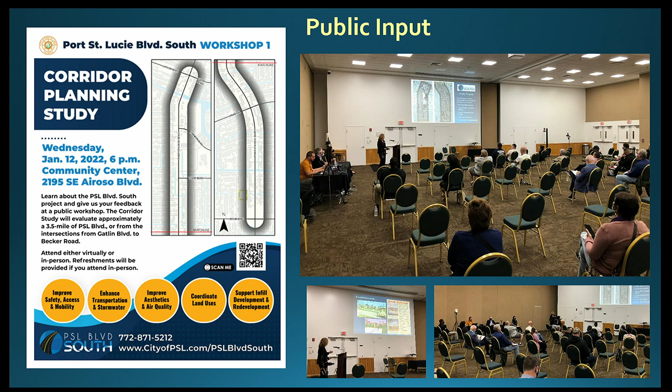In this venture, the city reached out to us to assist the city staff and the public in having a conversation about Port St. Lucie Boulevard. With respect to public input, this workshop is the second one. The first one turned out about 40 people in the room and about 40 people online. So we had a pretty good participation back in our kickoff workshop to get ideas about what kinds of questions we should be exploring as we think about how the corridor performs.

And we heard a whole lot from the public. What we heard was, it's the PSL Speedway. So there's a lot more speeding than could be safe for folks to walk or bike or even drive on the corridor.

We need transit on the corridor. We need wider sidewalks and street trees. It's too crowded. There are too many new single-family homes being constructed, even though that is the default condition, right? We have platted lots of record in the city, so any single-family lot that exists can be built as a single-family lot. Nothing would ever suggest those rights would be taken away. However, that means a lot of driveways intersecting the roadway, and that creates different problems when it comes to traffic circulation and access and mobility as well.

And so if not single-family homes, the public said, can you think about other things that might be appropriate otherwise? The city's already taken some steps to try to allow different types of development, and we have some illustrations for you to think about this evening.

The widening of the road is overdue. The city needs more playgrounds and active space and tree canopy and fitness trails and things to do and places to go, because the city is long on population but short on those kinds of destinations.

Intersections are becoming more challenging. We need to be concerned and mindful about paying for improvements if we identify them, and so the improvements that we've identified, we can have that conversation as well.

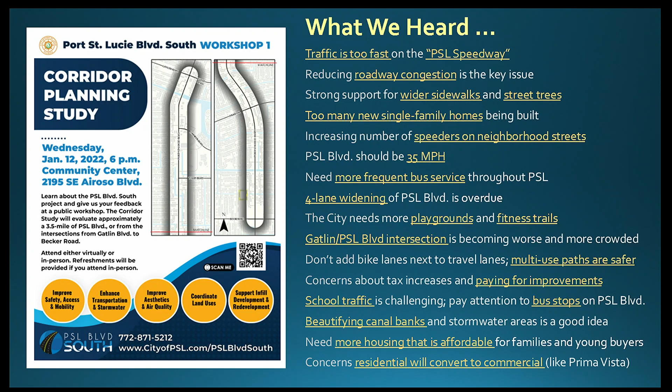And then finally, of course, we know that residential has tended to convert to commercial over time, and that's something we should be mindful of on the corridor, because that creates different conditions when single-family homes now then become operating as small businesses. So that said, just a little background, if you will.

The city of Port St. Lucie is one of the fastest growing cities, not just in the state of Florida, in the United States. It's now the 7th largest city in the state, and the largest city in the Treasure Coast region. The city's done a really excellent job of documenting how quickly it's growing. But just by way of illustration, looking at our population, we're already at 214,000 people and projected to surpass 300,000 in the next few years.

With rapid population growth comes an impact on services and facilities and infrastructure that creates the need to have conversations like this one: take a pause for a moment and reconsider land use patterns before that next wave of investment and residents land on the ground.

The kinds of trends that we talked about in our last workshop, and the kinds of trends that we ask communities to consider as we think about planning, are summarized on this next few slides.

One of those trends is our population demographic is changing in Florida. It's changing across the globe and across the country, and in Florida as well. We're getting older and younger at the same time. The baby boomer population is actually going to be the smaller segment of the population. What's growing are the millennials and Zoomers, the next generation down. Millennials will be 50% of the workforce in the next 10 years. And Florida is getting older as a community at the same time.

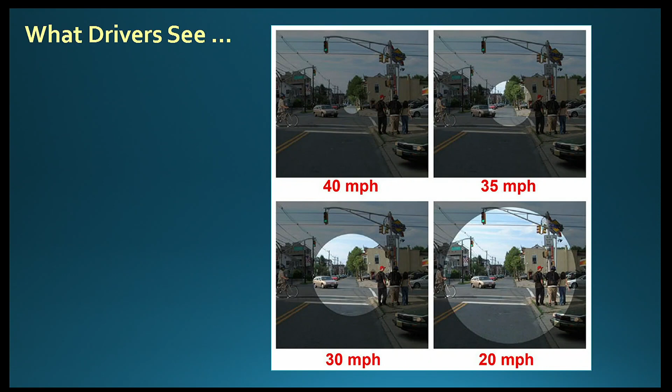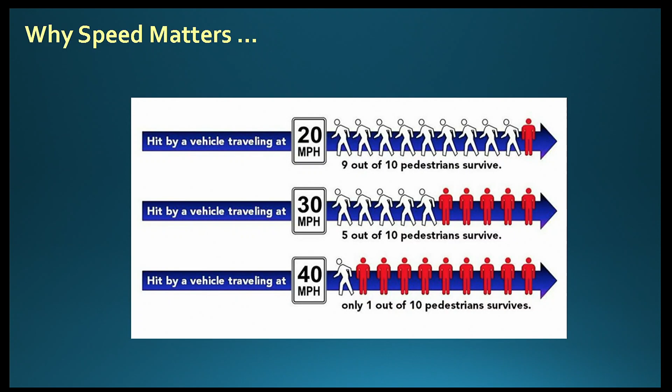The other reason speed matters is that the faster drivers are moving, the less likely you are to survive an accident. At 20 miles an hour, 10% of accidents tend to be fatal, but at 40 miles an hour, 90% of accidents are fatal. So again, speed and the comfort with which drivers can move quickly or appropriately for the corridor has a direct relationship to the safety of our community and the quality of life we get from our transportation network.

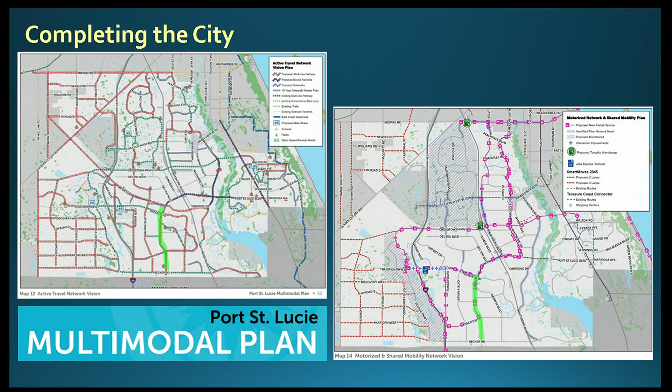The city's multimodal plan identifies improvements for Port St. Lucie Boulevard, which is highlighted in green—our segment is highlighted on the screen. As many of you know, and we discussed before the workshop, the roadway is going to be widened. In fact, widening is underway now. I'll jump forward to that in just a moment.

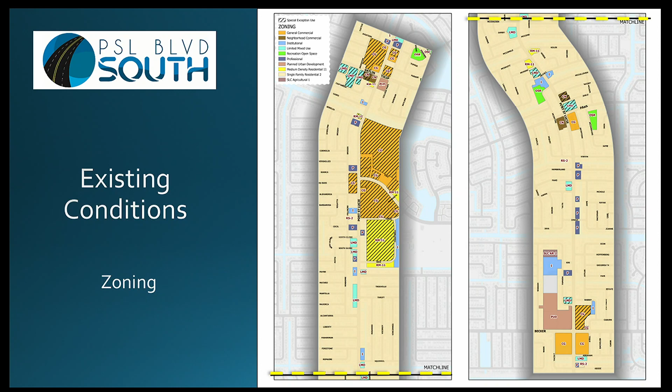With respect to zoning, though, we know that most of the properties have a residential land use designation, so there's an extra consideration necessary for them to go through that overlay process and become something other than single-family residential. We don't have a lot of vacant land left on the corridor, and that's a challenge for communities—not exclusive or unique to Port St. Lucie. It's a challenge most of Florida's communities are dealing with, at least in the Treasure Coast region, where we really are out of land in the core part of our cities, so redevelopment and infill development is much more difficult. It's a lot easier to build the perfect land use pattern when you have an open field; it's much more difficult to retrofit that pattern and find opportunities to make improvements.

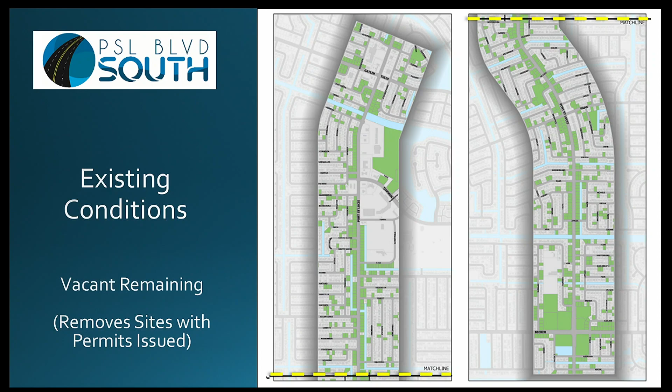This slide illustrates the vacant parcels that are left on the corridor. I have a series of maps that details those as well, but we acknowledge in the planning study that we have to be very strategic in finding those sites that can be improved in a different way.

Again, with respect to the roadway, everyone can breathe a sigh of relief—the roadway is under construction, being expanded from 2 to 4 lanes. As we heard in the workshop, there's a strong need for us to have more roadway capacity. As the road is designed today, this series of slides illustrates the landscaping opportunities that exist along with the road. As you can see, the city's already planning to have 2 11-foot travel lanes.

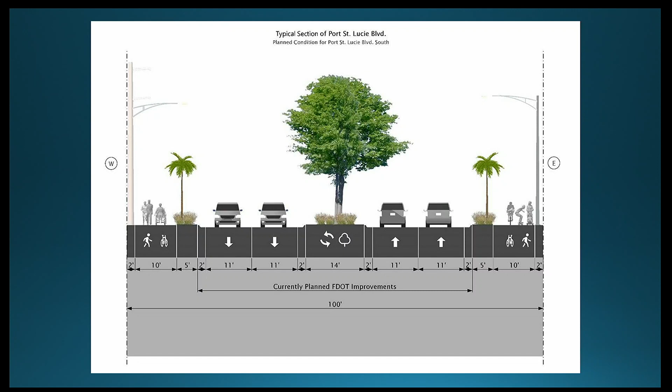As you can see, a fairly large median in the center—that median's about 14 feet. But then a fairly narrow landscape strip on either side, a 5-foot landscape strip with a fairly wide multi-use path. We generated some designs so we could get an idea of how that pieces together. In the landscape median in the center, it's wide enough to accommodate shade trees, which is great. The landscape strips on the side, though, are a little bit narrow, so in a 5-foot dimension you can accommodate a palm tree or maybe a crepe myrtle.

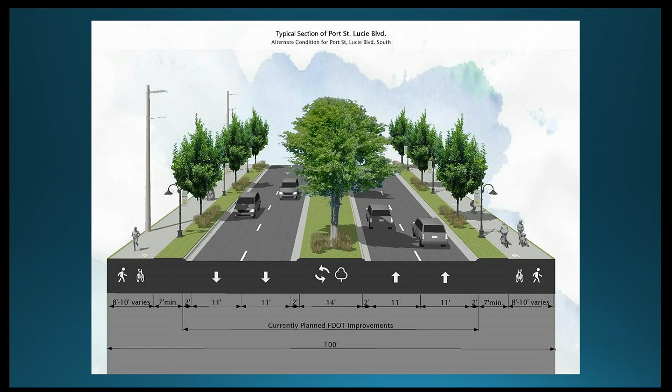One of the considerations we've suggested to the city is if we can, in some locations, widen that landscape strip just a little bit, we can accommodate larger shade trees. Those larger shade trees would help improve the appearance of the corridor and also provide more protection to the sidewalk, the multi-use path that exists on the side. Here's an example of how that exists in plan—existing condition, either palms or crepe myrtles—but again, that larger shade tree opportunity comes with a slightly wider landscape strip.

You can really get a better feel for how that looks at the ground level. There's the kid riding his skateboard who was riding it before the sidewalk was improved—now he's on a multi-use path. With either palm trees or crepe myrtles, there's some separation for that user on the sidewalk, but with a larger tree species, it's really game-changing. It's a small strategic intervention that creates a very different outcome for the user's experience.

The road can still travel just as fast, but a 10-foot multi-use path with limited landscaping isn't always as effective and desirable as maybe a slightly narrower path that's really well shaded. So this is a suggestion to offer to you as a community, to get feedback about whether or not you think that's something the city should explore.

I'll take a moment of pause and have a drink, because I want to be sure we have a chance to answer questions from you guys, and also just ask Lauren to see if there are any questions on Zoom. Keep going? Okay, I'll keep going. Yes, ma'am.

I think that's a great idea. I love it. I just have a quick question. So for the group who couldn't hear the comment, Millie thinks larger shade trees are a great idea, so worth exploring, okay? I see Jeannie's giving a thumbs up also, so, okay.

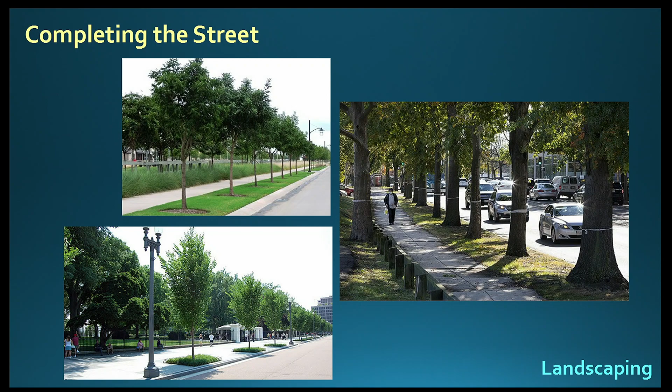All right, keep rolling. So when we think about completing the street, what are the tools in the toolbox that we have? The tools are things like bulb outs and curb extensions to slow traffic as it enters neighborhoods. We have an opportunity to light crosswalks, raise or light them so folks are more visible at night. We can add landscaping, and the type and quantity of landscaping has a material effect on how comfortable it feels to drive quickly. That's a strong consideration for the city with respect to how that corridor is built out over time.

Street lighting adds an amenity to the corridor because it doesn't just light the corridor, it creates a branding opportunity and a sense of place. Transit shelters are on the horizon — the city's done a tremendous job identifying an artistic transit shelter theme that will be implemented through the city. This corridor is on the long-term plans for transit service, so ultimately you'll see transit shelters like this one being installed.

A specific recommendation that came out of the process is the idea of having pedestrian refuges. One thing we know is that we have a pretty good distance between lighted intersections along the corridor, and pedestrians are usually comfortable walking a quarter to a half a mile. After that, people don't like to make that trip as often, and they tend to take shortcuts if there isn't an accommodation to allow them to make a safe crossing.

On our corridor, we have 1.25 mile spacing between lighted intersections at the southern end. So a way to accommodate pedestrian crossing along a corridor that's going to be a four-lane corridor is to use a pedestrian refuge, or what's called a HAWK signal, which is a high-intensity activated crosswalk.

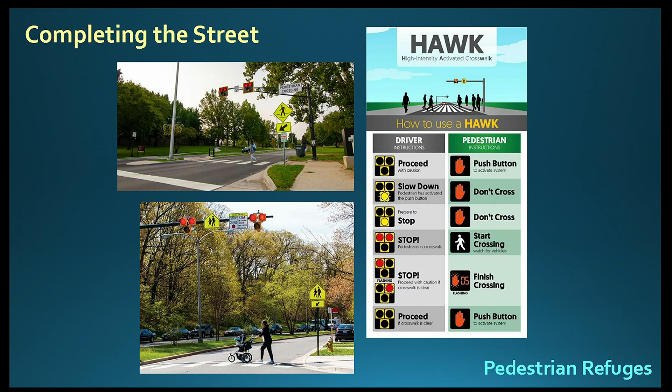It acts like a lighted intersection, but it's just stopping the cars to allow the pedestrian to cross, and then the light turns green again, and the pedestrian can be accommodated in the median.

There are two locations that we've identified for pedestrian refuge, and those are down at Gig and Macomb. Those locations break the distance down into thirds, so you'd have no more than a third of a mile between lighted crosswalk and pedestrian crosswalk.

So this is a suggestion to the city to consider. FDOT, the Department of Transportation, is amenable to that, and the city is exploring the permitting that would be necessary to install those, if that's an idea that the public thinks is a good one to explore. I see some nodding heads, so okay.

Moving on, yes Lauren? We do have a question online from Cheryl. She was, I'm assuming, talking about the street sections earlier. She says it doesn't look safe for cyclists to ride on the path with no bike lane.

The city's design does not include bike lanes on the corridor. Instead, bicyclists and pedestrians would both be accommodated in a multi-use path. There's a trade-off in the width of the multi-use path and the width of the landscaping strip, and that needs a lot of exploration. Fast-moving cyclists want either on-street bike lanes or wide multi-use paths, but they don't tend to represent the bulk of riders who are out there.

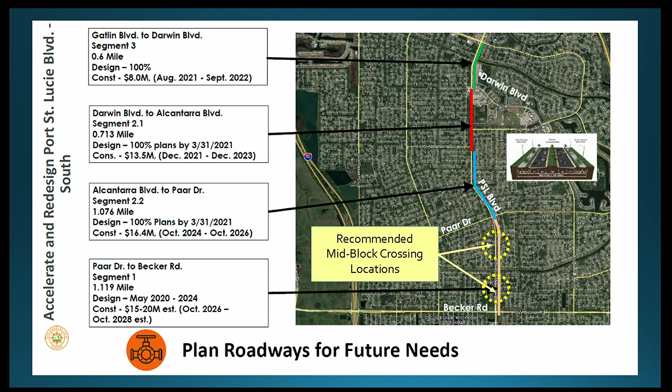Jumping down, the tour of the corridor. Through the design process, we mapped out the corridor, all of the ownership, and all of the existing buildings on the corridor today. These maps illustrate a figure ground that takes us from Gatlin Boulevard all the way down to Becker Road.

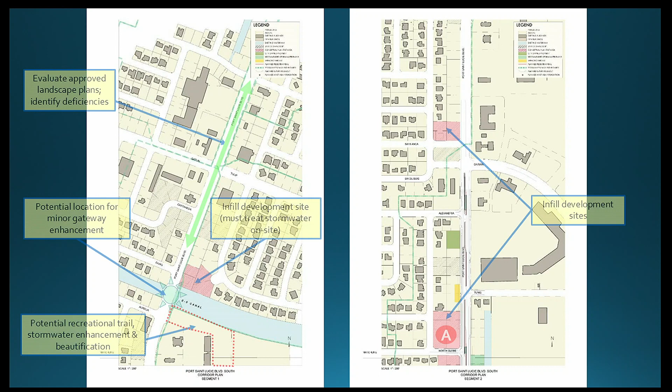As part of that process, we identified all of the opportunities that were reasonable to consider for some type of improvement. From Gatlin to the E-8 canal, we don't really have a lot of vacant land to work with, so identifying properties with landscape deficiency is the best way to improve that corridor. If a property's landscaping is deficient, the city has the ability to work with that owner. Keep Port St. Lucie Beautiful is a great partner to help private commercial property owners bring their projects back up to code. That's really the extent of the likely improvement in that section.

But as you get south on the corridor, there are lots of opportunities identified through the process for different types of aesthetic enhancement and beautification. For example, the E-8 canal—I'll go into detail about these, but I wanted to give you the overview as we start to tour the plan.

Those parcels in pink are the parcels that have common ownership of more than half an acre. Those are the infill development opportunities. We tested a development scenario using parcel A down at the bottom of the slide, and then parcels B and C across the street.

Those are up near Darwin Boulevard, just north of Darwin Boulevard, pardon me, where we have opportunities to expand stormwater through the city's acquisition, identified in green. There are methods the city can use to acquire property and improve it for stormwater and passive park use at the same time.

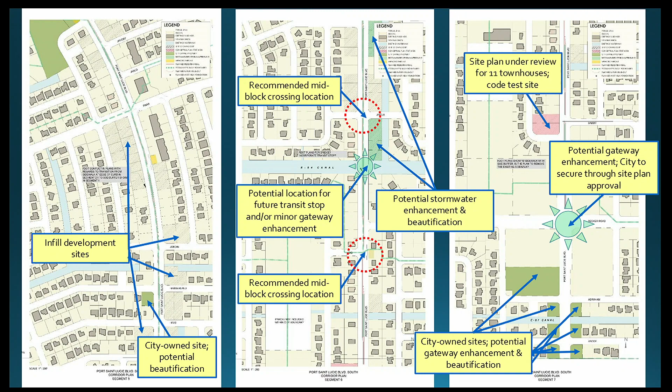As we get further south down the corridor, there are a series of modest infill development sites, 2 acres and smaller. The mid-block crossing locations are identified in those red circles down near Macomb and Jingle near the school, and there's an opportunity for a significant improvement at the intersection with Becker Road. I'll go into the details of those, but we do have a broad view perspective as well.

So the first category is ways to get more out of stormwater properties. As we tour the corridor, the canal banks and the banks for stormwater conveyance, ditches and canals, are city-owned parcels that serve a very important function in the city. We don't want to suggest anything that would compromise the function of getting stormwater out of the roadway and into its destination, which is the river, cleaning it along the way. So there's nothing we want to suggest that would compromise that. However, if there's a way for those properties to do more than just that purpose, that's an opportunity.

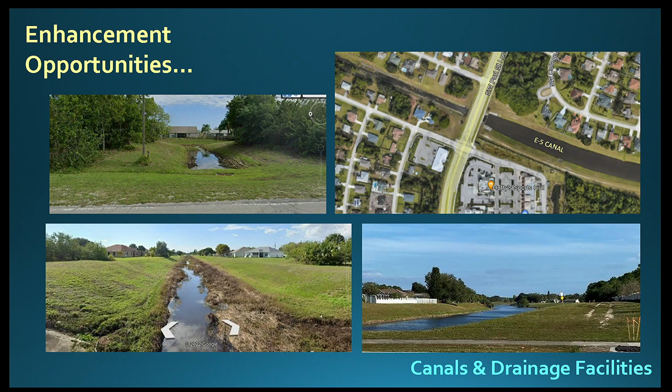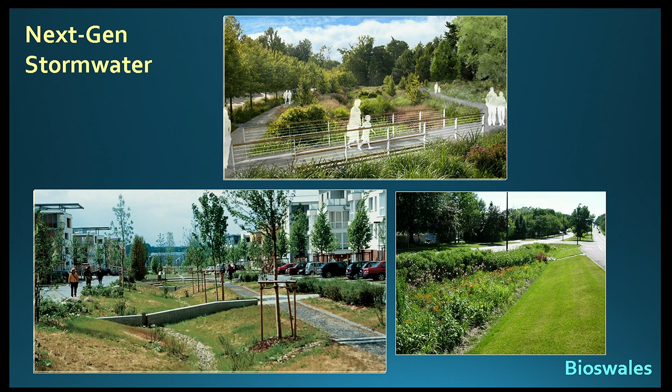Along the corridor, as you know because you live there, there are stormwater banks that when you're a designer like me, you think, gosh, that's a publicly owned parcel, and it could be something more than just a stormwater bank. Cities use stormwater improvements in lots of different ways. It's not just a canal that takes water to its destination—some communities use bioswales to make stormwater parks, rain gardens, which add stormwater treatment as part of the process. So it's not just an aesthetic improvement, it's a functional aesthetic improvement that cleans the stormwater as it enters the stormwater system.

A canal bank can become a higher performing public space if you add a shared use pathway, for example, along a canal bank. You can also add fitness stations and fitness trails along those banks as well.

As we tour the corridor, starting at the E5 canal, which is the northernmost canal, today's condition looks like this—these are actually pictures I took from my car. East and west of the corridor, it's the largest bank, the largest canal, and it plays an extremely important purpose in moving stormwater out of our district. So we don't want to do anything that would compromise that.

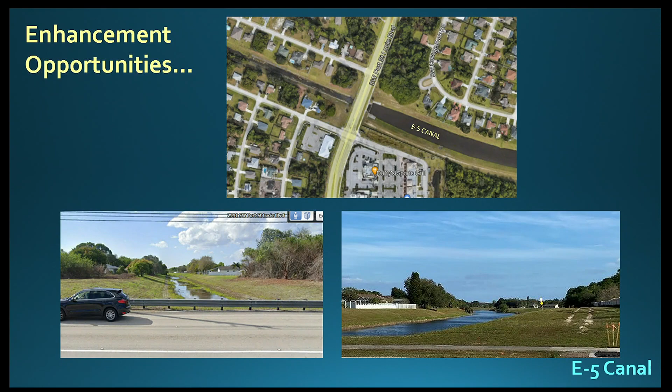But in addition to performing that function, there's an opportunity to add a multi-use pathway. As we look at the corridor from the air, if you imagine starting at the intersection with PSL Blvd—I do not have a mouse here, can I use a mouse? Great, thank you so much.

So if you start at the E5 canal, you can bring a trail facility down along the bank, along the now vacant, but likely to be developed property just behind Simpatico Plaza. You could come along the drainage canal and cut back into Darwin and bring a trail all the way down to the edge of another stormwater pond, across from the gym. You create about a 1.8-mile trail facility, which is a nice improvement to have in a city. We know from city surveys that residents are asking loudly for more recreational facilities and more places where they can walk to do things. This is an idea we think the city may wish to explore.

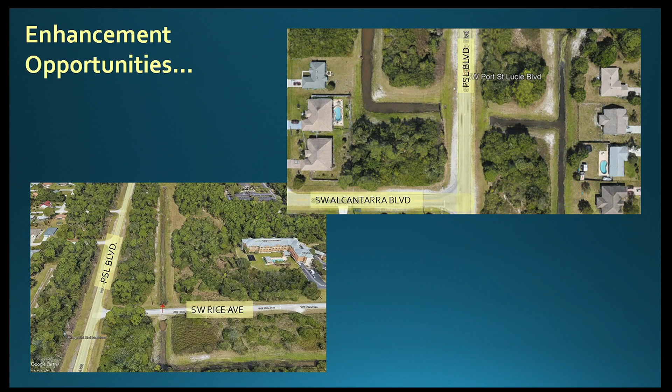Third example, a little smaller. We have some smaller ditches along the corridor as well. This existing condition happens to be down by Rice. Tomorrow's condition, again, just a little bit of landscaping and a little love, and you can create amenities along the corridor that we don't have today. So some ideas on stormwater. The city's staff has been reviewing those concepts to make sure they don't go too far, but those are ideas the city might want to pursue.

Okay? I'd like to say something. Yes, sir.

Down off Port St. Lucie, right where St. Thomas is, they built a trail right by the water. Sir, I can't hear you well, so we're bringing the mic back to you. We are more than happy to hear you. Go ahead, sir, could you please repeat your question? Okay, right down here in Port St. Lucie, right by McDonald's, they built a trail by the water. As I drive by there, I think of it as a desert. If you go out on that thing, there's no shade whatsoever covering it. I think spots like that should be added so you could go out and stroll and say, wait a minute, let's go hide under the shade here.

Sure. So the idea of adding tree canopy is a priority the city has. That heat island effect is actually measured now on a national basis, because there's a heat equity, shade equity conversation that happens in communities. That's a great point you make. That's the type of thing we think seems like an opportunity for the city, where we can add more trees to give us canopy. We have the ability to reduce heat impacts, and that has a beneficial effect, not just from an aesthetic standpoint. It looks nicer to have trees along an edge, so why wouldn't we do that? But it also makes our sidewalks and multi-use paths a lot more functional, so you can get out of the sun for a couple of minutes. So thanks for raising that point.

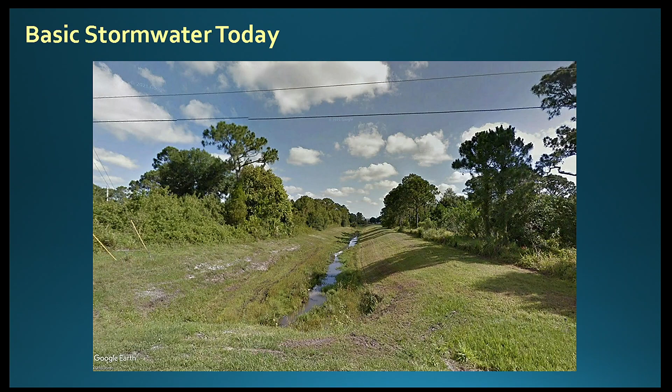There's a question online: what are the major intersections near each of those canals? So the major intersection by the E5 canal is going to be Darwin. And as you can see, that trail takes you from... I know this one is illustrated, so that's why I wanted to show it to you. This canal runs from just north of Darwin, and the trail idea would take you through that property back over here to Belmont. So that's the idea with that one.

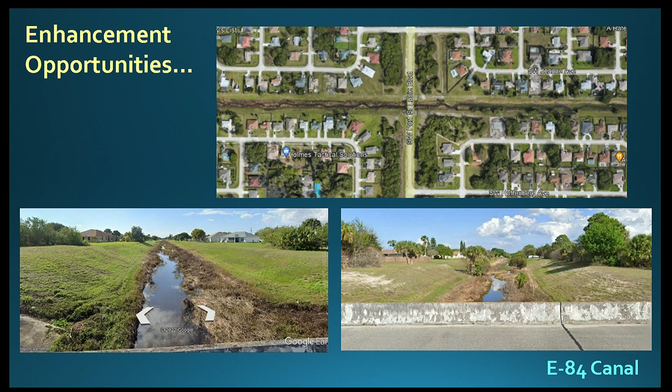And the E84 canal, Lauren, I think is down near Macomb? Jingle, thank you, Jingle. Southeast of Jingle, if I remember correctly, is the other major canal. But we actually have these canals and ditches all along the corridor. So if this is an idea you guys think is worth pursuing, the city has about 11 different canals and ditches that intersect the corridor between Gatlin and Becker. Different scales of improvement might be appropriate, but nonetheless, if there are ideas worth pursuing, that's something the city can pursue.

Okay? All righty, keep rolling. Questions from you guys? No?

Okay, keep rolling. Land development considerations, okay, a little trickier. A couple ideas to keep in mind as we get into the conversation: nearly 30% of all developed areas are roadways. And the roadway is always a community's front door, okay? So whenever you're going home, the roadway is your driveway because it brings you to your front door. So an idea to consider: there's a relationship between street width and building height. That's an architectural axiom, if you will, and the ideal relationship is a 1-to-1 to a 1-to-3 relationship.

I'll give you an example of what that looks like. One degree of height to three degrees of width is the ideal relationship from an architectural standpoint to enable a street to feel comfortable for pedestrians. That's kind of the measure. So 1 to 3, and this is typically like a downtown condition. If you've ever been to downtown Stuart, it's actually a 1-to-3 ratio on Osceola Street. As we fall away from that ratio, we end up with locations that don't feel as comfortable for pedestrians.

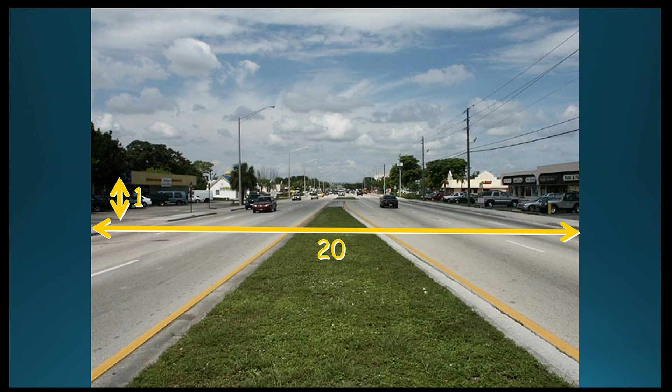So the way we break down facilities like that is by adding landscaping, like the shade trees we talked about. Large shade trees try to bring that space in so it doesn't feel as comfortable to go as quickly. Building location does that also. Those are the elements we can use to maintain our best height-to-width ratio. That's just something to keep in mind.

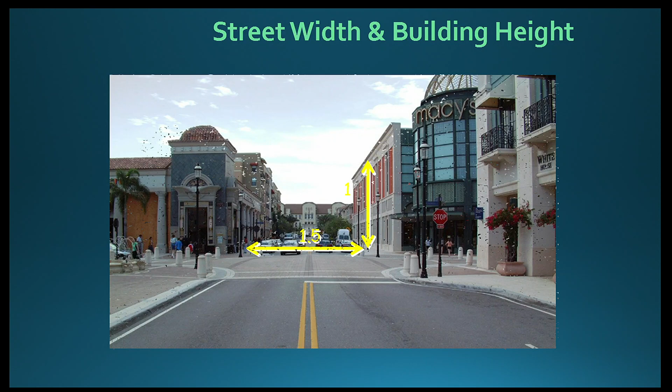An example, this happens to be City Place, or now it's called Rosemary Square, if you've been down to that location. When Macy's was still there, and there's a new building coming in now, it had a 1-to-1.5 ratio. If you start to spread that out to a 1-to-5 ratio, it's not as comfortable for the pedestrian, and cars feel more comfortable going quickly. If you give it a 1-to-10 ratio, it completely changes the character of the place. So again, that's an axiom to keep in mind.

And then back to its existing condition. So height-to-width ratio, a factor to consider.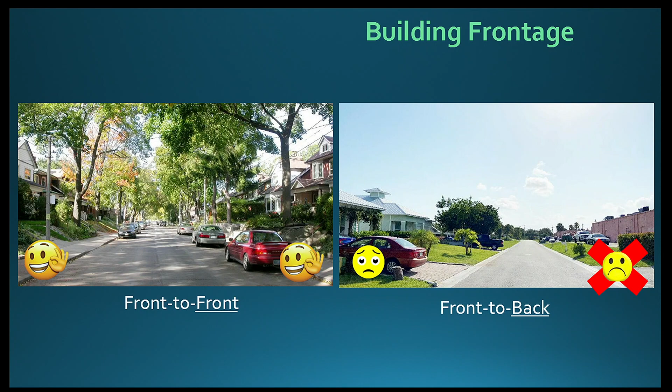So I want to put these ideas in your mind as we talk about some examples of infill to consider.

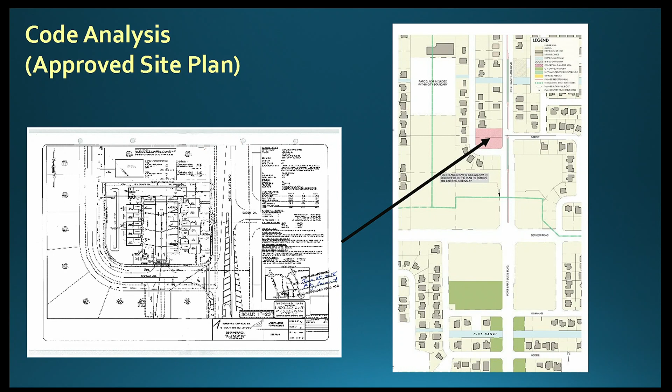We have a new townhouse project that's been approved and is going through final stages, and we use that as an example to test the city's code and understand how the code is performing. There's a new townhouse project on the southern end of the corridor — an 11-unit townhouse project. This site plan is already approved and meets the city's code. It's 11 townhouses on 1.05 acres, so 11 units per acre, permitted by the city's code. The townhouses vary in size from 950 to 1,250 square feet, and each one will have a one-car garage.

Thank goodness, you think, if you think about the city's portfolio of residential uses, geez, we really need townhouses because I'd like my kid to come home from college and have a place to live, or my parents that have lived in their house for 30 years can't mow the yard anymore. I really want them to stay in the neighborhood, but there's nowhere for them to go. So if you think about it from that perspective, it's really, in some ways, a use that perfectly meets that need of diversifying the housing stock.

The project has 25 total parking spaces, and all the stormwater is handled on site. So everything is built per the code.

But if you think about arranging the site a little differently, and it's not a suggestion for this property in particular, just as a test to think about some of those axioms, some of those principles: if you were to create a scenario where the building fronts were actually going to face the other building fronts, like in this scenario, I should point out, the building fronts face each other across the driveway that comes in from the street. There's one point of access.

And by doing that, and shrinking those setbacks a little bit to make them 25 feet, which is the front setback requirement, because you'd call this road a front, the building front would be along the roadway, you actually get a larger retention area. So you treat more stormwater on the site in a more efficient manner. Because in this scenario, you have a long, skinny drainage retention area, which doesn't perform as well as a wider drainage retention area could.

In an alternative design, again just food for thought, if this was an idea to explore: same number of townhouses, you have 11. Same number of parking spaces, you'd have 25. Same amount of stormwater being treated on site. These townhouses are actually a little bigger because we were able to fit slightly larger townhouses, so these are all 1,200 square feet instead of that smaller range. They all have one-car garages.

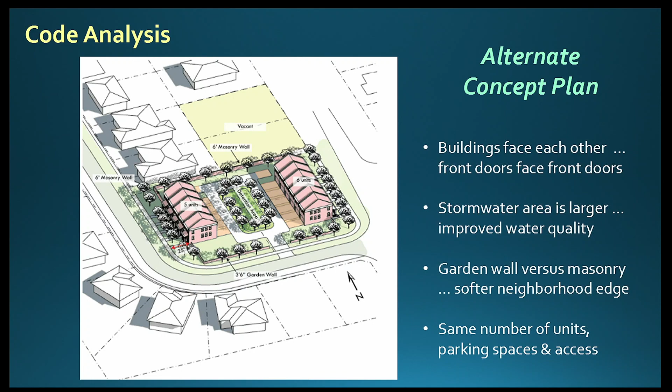It's an opportunity to explore, we would suggest. What do you get that's different out of a site like that? Well, building front doors face building front doors across the street. The stormwater is actually larger, so you get more stormwater quality. A garden wall would be the appropriate treatment instead of a masonry wall. Otherwise, you have really kind of an equivalent relationship as to the performance of that site.

A couple of examples of how that looks from the sidewalk. If you're driving down the street, the standard code would require a treatment that looks like this—there's the 6-foot masonry wall. She's about 5.5 feet tall, so the landscaping happens on the other side of that wall. A little bit of landscaping perhaps can be installed on the outside, but there's not a lot of depth there. And then from the sidewalk, as you walk around, you're facing the backyard of somebody's house.

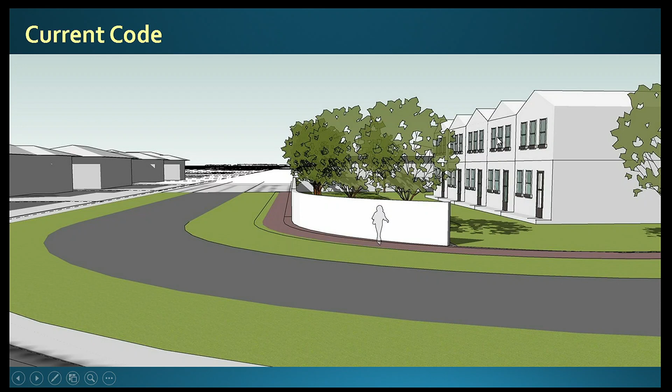An alternative, again, if we flip those buildings around, that masonry wall wouldn't happen. If you had a wall at all, you could put a garden wall in along the edge.

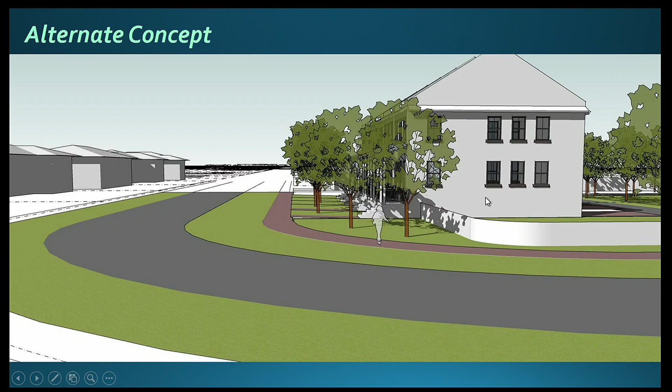And the front doors of those homes would have sidewalk connections that come out to the sidewalk. The back of house takes place on the inside of that lot, facing the back of house for the townhouses across the way. So another example of how that might look, again, here's the approved condition as you drive around the corner. So back of house and masonry wall facing the street, or front of house facing the street.

So we wanted to test that, not to be critical of the approved project that meets the city's code, but to explore whether or not there might be a different way of doing things that could produce a better condition. With that in mind, we went ahead and tried to find a location where we could test these principles in a site that isn't developed yet.

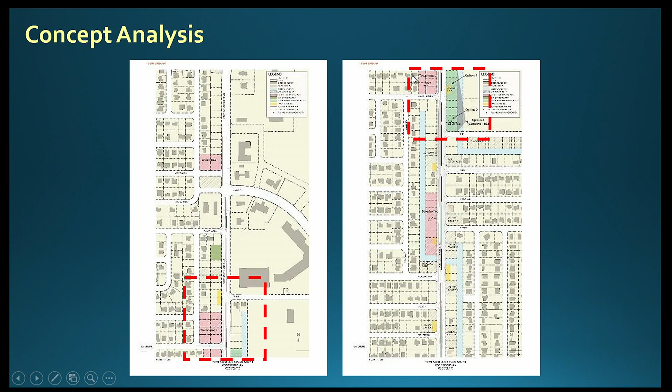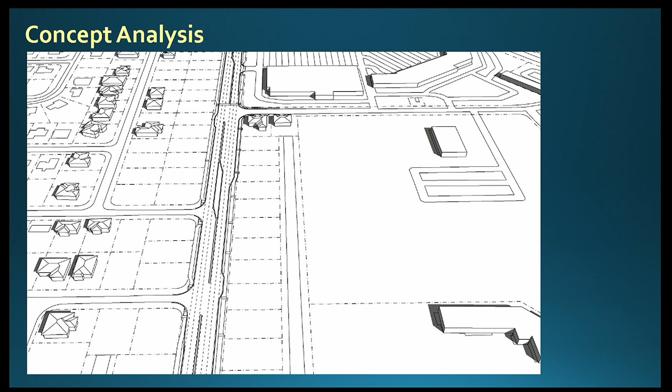There's a relationship between 3 parcels on the corridor: parcel number 1, 2, and 3. Again, this is just a theoretical test. There's no proposal embedded in any of these illustrations. They're for the purpose of illustrating ideas, to see whether or not they're ideas worth exploring as a community. So the sites we tested, sites A, B, and C, it doesn't matter who owns them, because this is all in theory.

We tested the city's code to understand what you could build on site A. Site A is 1.91 acres, and the city's code would allow you to get to 21 townhouses, staying below the density, if you develop that site to its maximum ability. It's not a very comfortable site—we wouldn't suggest as planners this is a very desirable condition. It's a bit tight, so we actually tested it with a slightly lower density to get an idea as to whether or not this might be something the city would want to pursue.

This site A concept illustrates 18 townhouses, which is less than the permitted density—only 9 units an acre. Remember, the first one was 11 units an acre. At 9 units an acre, you could theoretically, if you adjusted a few things in the code, allow a pattern of development like this versus one that would put its back to the street.

In this design, common access comes from the center side street. Let me jump back for a moment to make a point: 1, 2, 3, 4, 5, 6, 7, 8 single-family lots, which could be 8 driveways connecting to this street and 8 driveways connecting to the interior street. That's kind of the default condition—8 single-family lots permitted by right. No one takes that away in anything that they draw or suggest.

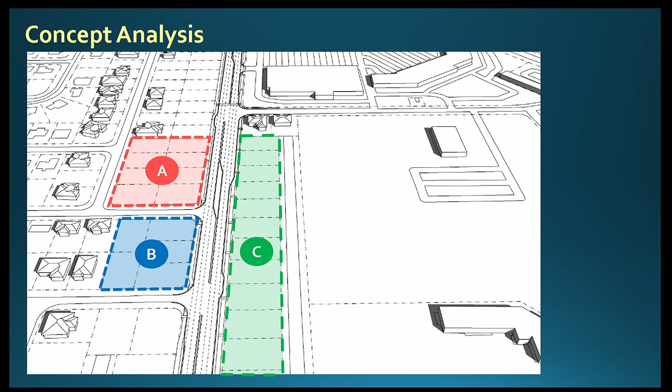The alternative condition, if this is an idea worth pursuing: instead of 8 units, it's 18 units under the allowable density. Instead of 8 driveways connecting to the street, there are 2 driveways that connect to the street. None of them connect to Port St. Lucie Boulevard—they only connect to the side street and the interior street.

All of the stormwater can be accommodated on site. The difference between this plan and what's permitted in the code is that this plan is designed with the building fronts facing the interior street—fronts are facing fronts. In doing so, the setback is narrowed from 50 feet to 25 feet to turn those buildings around, to allow them to meet the street in that location. So that's the big change.

This concept as an idea would enable the development of 1,200 square foot 18 townhomes. They could either have 2 cars of covered parking, or 2-car garages—we happen to illustrate them as covered, but they could be 2-car garages. They are accessed from the interior, so the backs of those buildings face the backs of the buildings across the parking area, and the fronts of those buildings front the 2 streets.

So building fronts front the street to the rear, and building fronts front Port St. Lucie Boulevard. The open space for the site is accommodated in a few locations—there are open spaces at either end, and then there's a fairly large open space along Port St. Lucie Boulevard that creates a bit of a promenade or a setback for those townhouses.

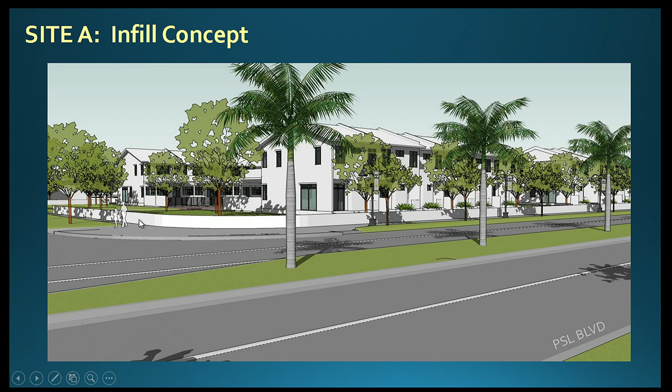So as an example, how would a site like that look and feel along Port St. Lucie Boulevard? Is this something we would like to see? This is a scale model to illustrate what a townhouse project like that could look like. Here's Port St. Lucie Boulevard shown at its planned dimension, with our 2 11-foot travel lanes and a 5-foot landscape strip. The trees are a little smaller than they ideally could be, but we wanted to illustrate. You'd have a garden wall along the edge, and townhouse fronts would be facing the front street, with the interior backside of those houses facing each other. A couple examples of how that would look from a scale standpoint, potentially a design standpoint.

There are probably 100 different ways to design a site like this one. This is just one for your consideration. So as you can see, back to back, front to front, 25-foot setback. You'd have sidewalks that would connect to the sidewalk inside the neighborhood.

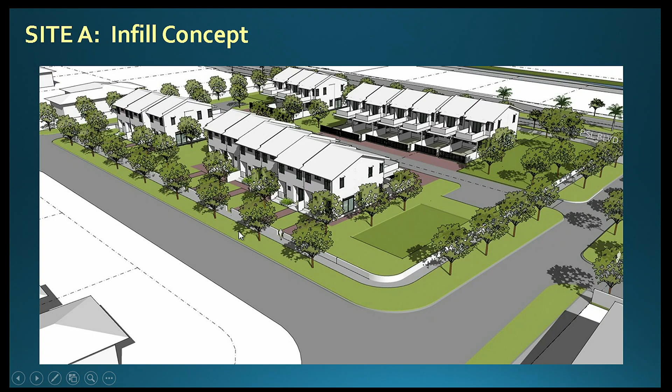So an idea of what does a 25-foot setback look like? This is a scaled representation of sidewalk on the interior street. You'd have maybe some type of garden wall along the edge, not a 6-foot high masonry wall because it's a front door. Maybe if you have a wall, maybe a 3.5-foot high little garden wall to create some separation. And then, 25-foot setback, and then the fronts of those buildings. An idea of how that looks maybe from the sidewalk.

So that's one way to think about redeveloping sites, or really infill developing sites, in a manner that's a little variation from what the code would otherwise require. Because what the code would tell you is you have to treat that interior street as the back, so the back of those townhouses and a 6-foot wall has to be along the interior neighborhood residential street. So this condition would be a 6-foot high wall and the back of houses facing that street. A different way to arrange land development, for example, along the corridor.

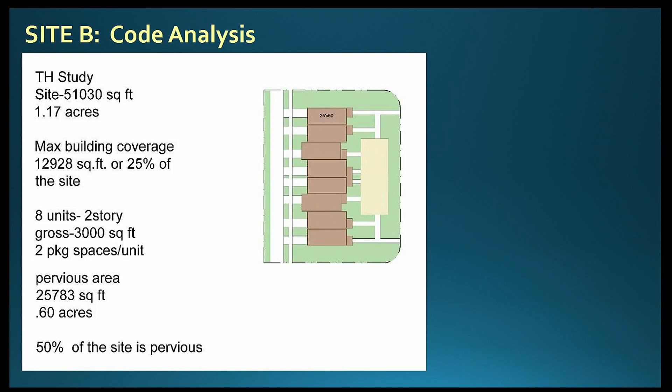I have another example to use as well. We looked at the adjacent site, which is just under 1.2 acres. We tested the code to see what could fit, and in fact, what fits is 8 townhouse units.

All of the stormwater would be located along the frontage of Port St. Lucie Boulevard. Not a bad thing, because stormwater accomplishes that function of retaining and cleaning stormwater, that's important. It also does create open space, but because it has a depression, it's not as functional as open space might be from a recreational standpoint, because you're not going to walk through a retention pond or area if it has water in it or it's a little marshy.

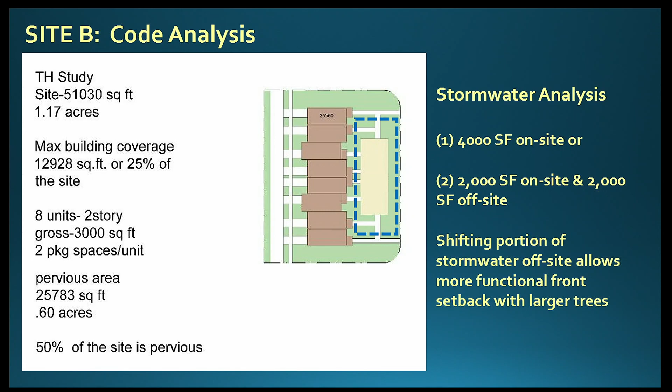But that said, can you build townhouses on one of these infill sites? In fact, you can. This site also meets the city's code. It uses Port St. Lucie Boulevard as the front and has its 50-foot setback, actually, from Port St. Lucie Boulevard in this instance.

The access to the property, instead of 4 single-family lots with 4 single-family homes and 4 single-family driveways extending out to Port St. Lucie Boulevard, instead internalizes that circulation, so it comes in from the side streets. In this instance, we have a back-to-side relationship because of the way the adjacent lots are developed, and so we do have a wall that's recommended between those two uses, which is in compliance with the city's code. So an idea of what a scale model might look like for townhouses along those lines.

So 8 townhouses—you can see the first set of townhouses modeled adjacent to them over there to the right. That retention area is handled in the front of the property, making a nice open lawn, but it's not really a lawn in the most functional sense because it has stormwater needs it has to accomplish, so it's depressed and isn't always usable in the same way.

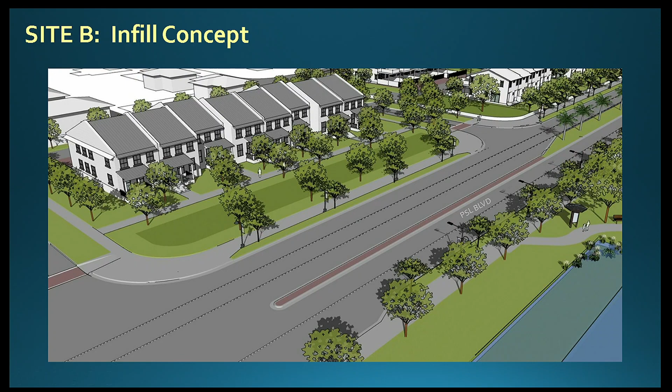By the way, Port St. Lucie Boulevard isn't going to 3 lanes. That's a turn lane on the roadway—we just forgot to drop the arrow in, just in case you were wondering.

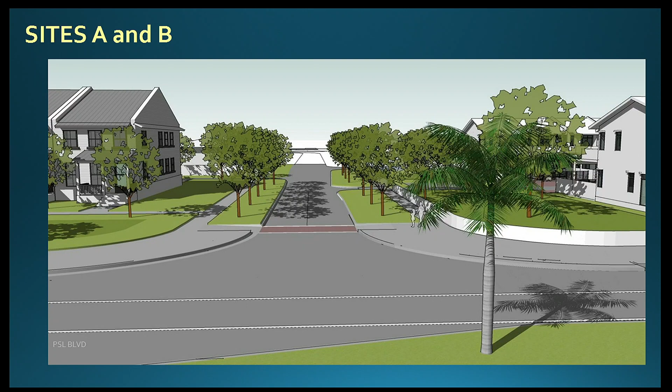So, an idea of how those uses might feel from the sidewalk edge: they're 2-story buildings with landscaping along the street edges. From across the street, this is kind of the scale those buildings would have.

Within the interior of that site, this is the scale relationship you'd have for those townhouses. Again, we have a back-to-side relationship, not as undesirable as a back-to-front relationship—that's the relationship you try to avoid the most. But we don't really have a choice in this instance, as this site gets developed, because those homes already exist with a side relationship to the adjacent structures.

So to accommodate that development program on the townhouse site, site B, you'd have a 6-foot wall—a full wall separating it. You'd have room to put in some landscaping, and then an interior drive that gives access to the rear of those townhouses that would otherwise be facing Port St. Lucie Boulevard.

It doesn't always have to be on the site being developed, because the city has done a tremendous job advancing a stormwater master plan. As part of that plan, all the property in the city is broken down into basins and then sub-basins, so stormwater leaving one property can actually be treated elsewhere in the basin—still accomplishing required treatment, but more efficiently.

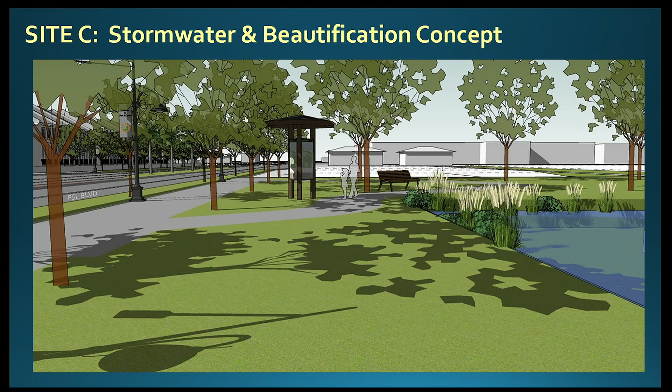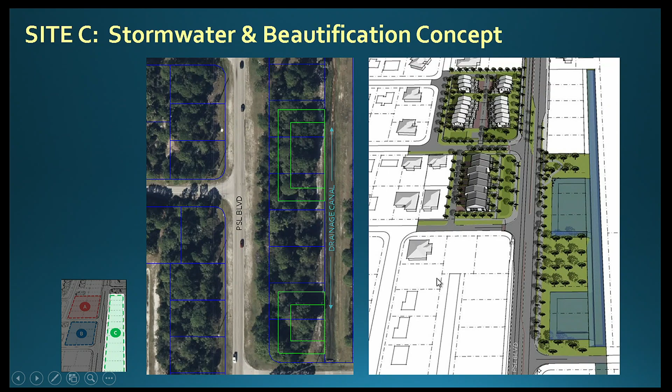It's also an opportunity to introduce beautification on the corridor, because the default condition for properties like this is all single-family residential lots, so they could all be single-family with, I think, 9 single-family lots with 9 single-family driveways. That's the default scenario. Instead, if it's desirable, those properties could look something like this.

There could be an acquisition of all or some of those parcels for creating stormwater improvement. That improvement can take place adjacent to the drainage canal, and you still have leftover land for beautification, like a bioswale or rain garden along the edge. You can expand the city's multi-use network and create pathways, kiosks, benches, lighting, landscaping, a place to get out of the heat, and create a neighborhood amenity.

So again, examples of what this might look like if desirable. Some street level views. Just to give you a scale relationship, those townhouses we talked about earlier would be the ones across the street. That's the scale of what infill townhouse might look like, with stormwater improvement really functioning as a city park in many ways—a stormwater park across the street.

A couple examples of what that might look like. This is drawn with the 5-foot landscape strip. Notice these trees are a little small—they're great to have, but not the bigger trees we illustrated earlier. There's decorative lighting with banners, the 10-foot multi-use path, and across the street, the townhouses. We didn't draw in the landscape median here because you couldn't see the buildings across the street, but you'd actually have a landscape median through much of this section of the corridor.

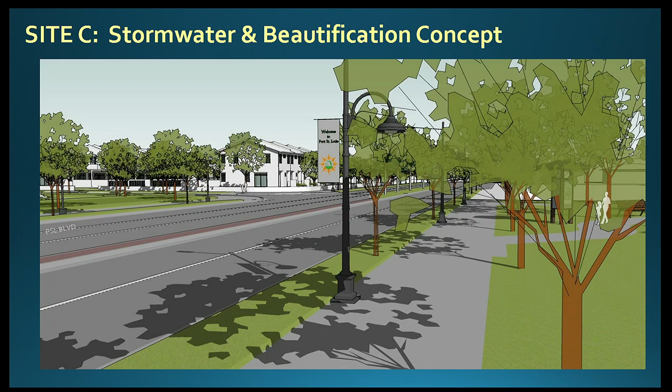Okay, great. Another idea that we think the city might want to consider is working towards a better tree canopy. It's not getting any cooler in Florida. I don't know if you've noticed, but the winters are harsher and the summers are even harsher than that. Tree canopy is identified as a primary way to mitigate heat impacts. This is not Kim's idea, this is pretty basic science.

So the city looks pretty green. If you fly over the city in a plane, it looks greener than it actually functionally is. It feels like we have a lot of trees until we really get into analysis of the city.

There's a tree equity group that looks at the United States for tree equity and canopy coverage, and their website is available. It's treeequityscore.org. It's a nonprofit that looks at tree equity as a factor of equity and livability.

You can type in Port St. Lucie and get an image like this. From a larger scale view, the city seems pretty green. But as we zoom in, if we look at St. Lucie County, which is mostly undeveloped, it has a fairly high tree equity score, around 88 out of 100.

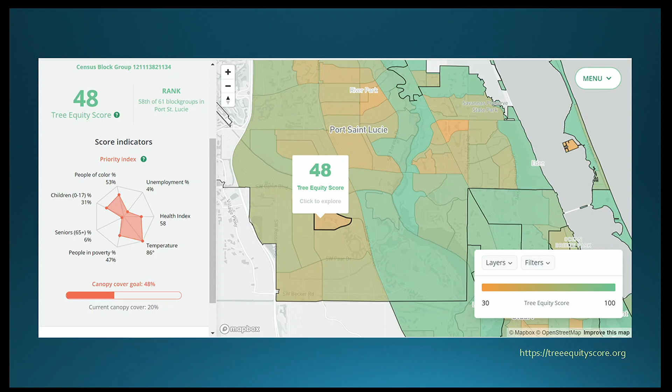As we zoom into our Port St. Lucie Boulevard corridor study area, which is the area you see here, we drop down a whole lot—we're down to about a 48 in total tree equity on the measure that's established. Whether or not you think it's a valid measure, it's at least valid to think about it in perspective versus those other geographies being analyzed by their metrics. So nonetheless, we're down to a 48 score on our corridor.

In terms of tree canopy, ours is down 28% from what's desirable. This is not rocket science—in the citizen summits the city's carried out, residents have consistently conveyed strong concerns that the city is getting more developed and losing its tree canopy, and that the city should either buy and hold land or add tree canopy back, because people miss that. So we know by these measures that the concerns people raise seem to be validated by scores like this one.

It's hard to reintroduce tree canopy. We've talked about getting larger, more substantial trees in what would have to be wider landscape strips along roadways when we build them—that's one way. Requiring larger trees on installation for commercial properties is another way.

A third way: if we have all the stormwater handled on every single property, you can't get big canopy trees to survive in a stormwater ditch, because that tree species doesn't live there. So if we require stormwater treatment on every site, we reduce the area where we can plant trees that give us canopy. Or we can shift some of that stormwater treatment off-site and require developers to plant large trees with a big canopy in the areas we allow them to use as open space. So those are the kinds of things we can do as a city. They're not big moves for the most part, but they're meaningful moves if we make those things happen.

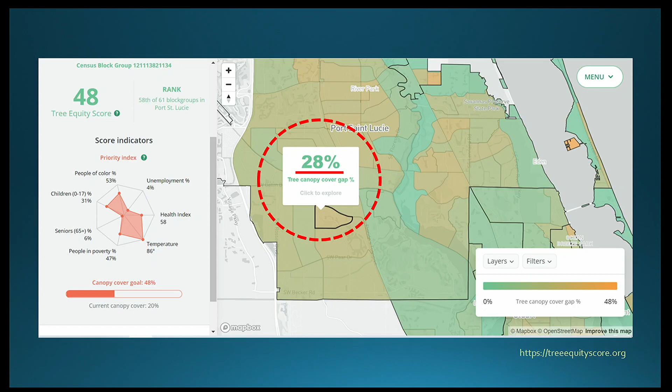They are pretty wide though, right? One side of that driveway is required to be, I think, 32 feet wide. Lauren, is that right, that number? I think it's 32 feet wide on the main driveway in, and up to 24 feet wide on the driveway coming out. So if you have an 80-foot lot, if you do the math, we're not left with a lot of area to plant trees if so much of that frontage is taken up by driveway.

The city does require 5 trees be installed on a single-family residential lot. Those trees can be installed in the front of the property, and what you notice is most of these new homes that are coming in have a single tree located in the center of the driveway, which is great, but there's an ability for the city to move a little further in the tree canopy that's installed in front of those properties. There's room to add more trees in the front of the single-family residential properties.

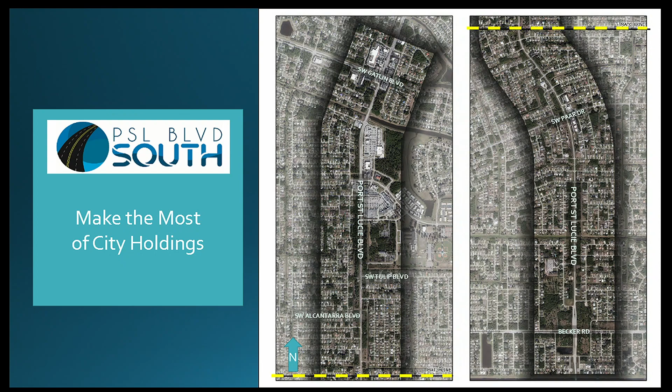The city owns a parcel at the corner of Macomb and PSL. It happens to be adjacent to a canal. Amen, because that means that site can perform a higher stormwater function as well as a beautification opportunity, an example of the kinds of improvements that you may want to consider as a community.

Maybe add a little public art along the edge to again create better identity along the corridor, and a little piece of respite along an otherwise busy drive to home or work or when you're out walking your dog on the new multi-use path.

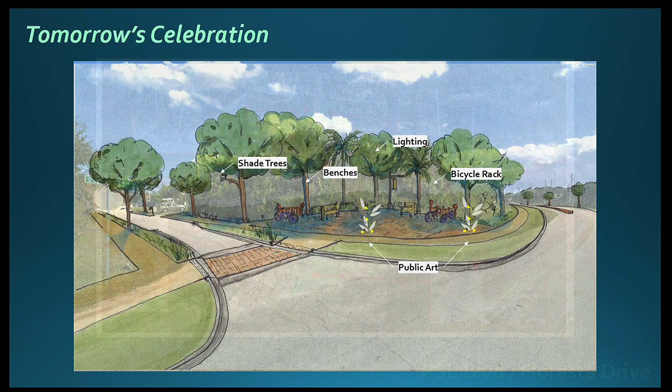There's another opportunity. So let me back up for a moment. Those are the general ideas and recommendations that we have for the subject corridor, which is Gatlin to Becker, okay? In addition, as part of this effort, we were asked to also talk to the public in this workshop about another opportunity the city has along the lines of make the most of the city's holdings.

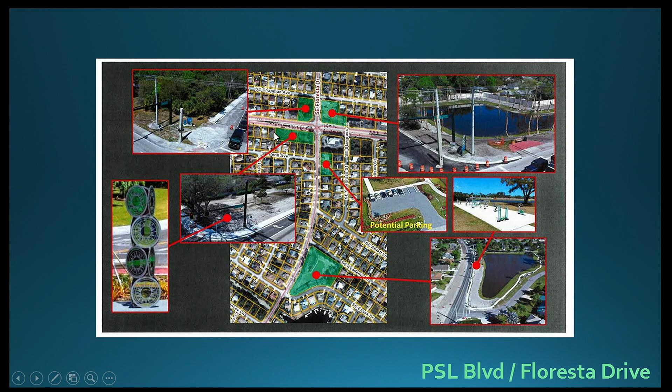So a little further north at the intersection of Port St. Lucie Boulevard and Floresta is a trio of city holdings, okay? So the city acquired some property to accommodate a turn lane from Port St. Lucie Boulevard onto Floresta, and the city now owns 3 of the 4 corners. So the city owns the northwest quadrant, the southwest quadrant, and the northeast quadrant. The northeast quadrant is where you see a stormwater pond being constructed today.

That stormwater pond is going to have some landscaping. There's going to be a city information sign at the front.

There is no set of plans yet for how the city might want to improve the other quadrants. The city owns the property across the street, and it owns the property catty corner. There's a pretty good-sized remnant left after the city put a turn lane in.

What we know is Floresta is going to have a shared use path constructed as part of that improvement, so you'll have a shared use path along this roadway. The city owns the corner of Floresta and Penn, so there's an opportunity to make some improvements there. The city also owns the corner of Floresta and Essex, where there's a large stormwater pond, and the city's in the process of putting in a path around the lake and some fitness stations, so you'll have a little fitness trail over there.

One of the questions the city wanted us to ask, since we had the good fortune of having the public join us in this conversation, is what do you guys think? Do you have any ideas about what might make sense on these other properties?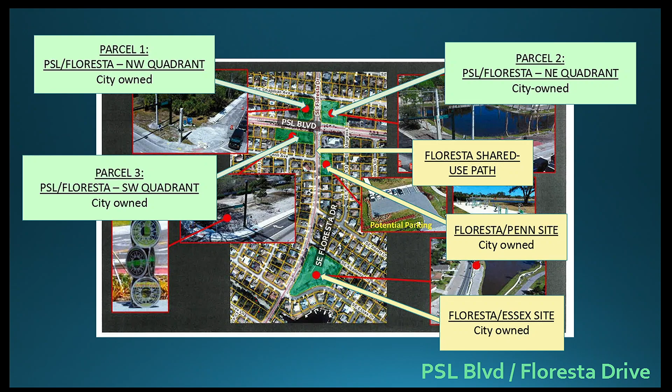So that might be something to consider as well, an add-on at key locations throughout. So as we kicked ideas around at a staff level, we actually also thought about that EV charging idea, because it is a growing segment of the population shifting towards electric vehicles, and there might be some spots that make sense on one or more of these properties for a couple of EV spots, so that if you need to go get a charge, you can plug in, charge up, and then walk over to wherever that little sculpture garden is, have a moment to take a breath out of the busy day, and then you're charged up and able to go. They can be fee-based, so there's not a cost to the city to do that, but it just creates opportunity to get a quick charge.

So Jeannie, you have any thoughts over there? Sounds good, I like it. I thought on that one where it showed charging your phone, I saw the handicap placard, so I figured maybe there's something for a motorized cart, handicap cart or wheelchair, something like that too. Okay, yeah, I like that, that's good. So, all right, cool.

Other thoughts from the room? Yes, ma'am, in the back. Hang on for just a moment, I don't know that I can hear you so well.

Art would be bronze, like the art in tradition with the children, or the art by Becker with the little children by the little water, or the one on US 1 over the Roosevelt. It could be, yeah, they look so peaceful with children, bronze children. Even the new one they put by Ocean Boulevard by the new cancer hospital, someone donated it, but they look peaceful. And then the other tree I was thinking about, I don't know if it sheds a lot, even though it grows big, we don't know how overgrown - the ficus tree.

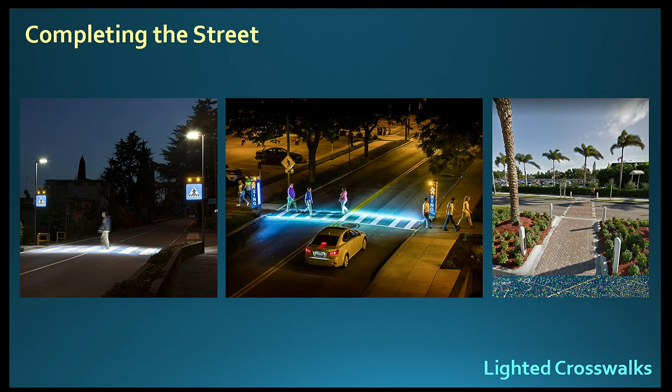While Kim's still bringing that up, I wanted to reiterate one of the images from earlier in Kim's presentation that hit home if you weren't able to visit our first workshop - the graphic of all the children currently using Port St. Lucie Boulevard South and their ages, from workshop number one. If you recall, you could see bicycles chained to any sign or makeshift element they could find. That really brings to light the importance of the users along that boulevard. I didn't know if any of you were already aware that particular corridor had that need.

I'm sorry, what did you say? Oh, that's your neighborhood, so you're intimately aware of it. Quit moving the mouse.

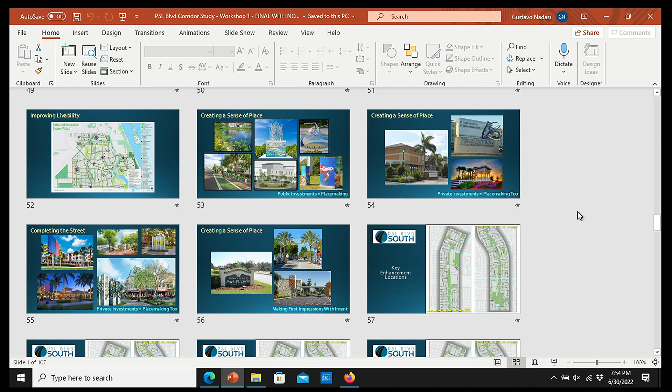Apologies - this is the first workshop that was presented back in January. There were some questions raised earlier, and thank you for all the feedback. The only way to make good decisions as a city is to get feedback from the public. I know this council highly prioritizes getting feedback through citizen summits and workshops, participation in person, by Zoom, and writing comments. On behalf of the council, since we're really the council's representatives, thank you for making this time this evening. What I wanted to illustrate for you is, there we go.

At the intersection - to Millie and Ed's question - before the workshop started we talked a bit about the intersection of Port St. Lucie Boulevard and Becker Road. The Regional Planning Council assisted the city about 10 years ago with an overlay zone for Becker Road, developed as the city was annexing properties to the west and starting to infill. That master plan identified the importance of what happens at the intersection of Becker and Port St. Lucie Boulevard. You never have a second chance to make a first impression, right?

So if you're coming off I-95 or the Turnpike, or coming north from Martin County, that is the moment of arrival as you enter the city. And as I suggested, there's only one road in the city that the city named after itself - that's Port St. Lucie Boulevard, and it leads to City Hall. So in terms of significance, what that plan recommended, and what the council has continued to suggest as we've assisted the city, is the importance of doing something significant in that location.

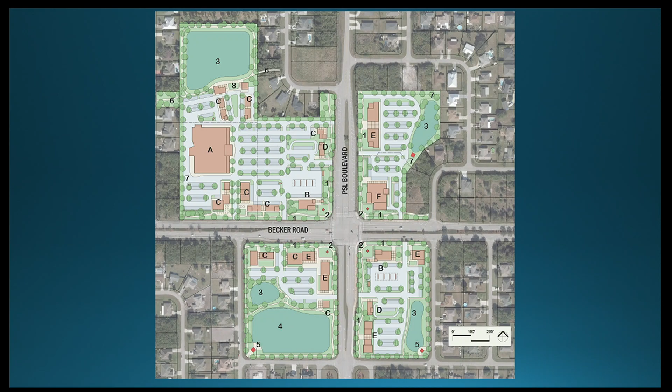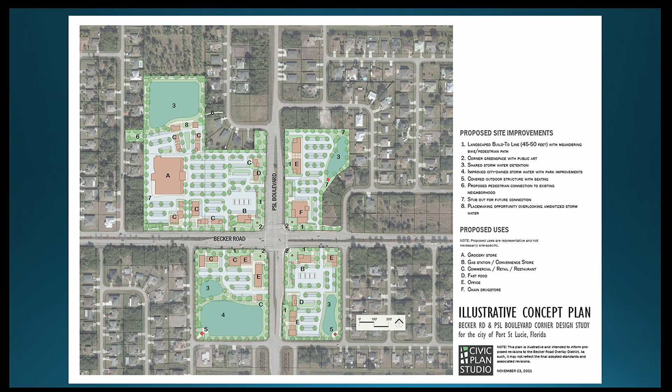In the master plan that was adopted, pardon me, this slide picks up some of those concepts. You may know the city is now in the development process for a series of commercial developments in that location. These concept plans were actually developed by one of the city's architectural consultants, who took those private plans and tried to assemble them into some concepts. The council assisted the city in illustrating what these corners could look like.

Again, at that primary intersection of PSL and Becker, the city really has control over commercial development on all four corners, because commercial development isn't permitted by right if it includes drive-through facilities, for example, and there are a number of users who want to put drive-through facilities or gas stations in those locations.

They all require special permission from the city, which gives the city the ability to influence the design of those sites if it wants to allow those uses to happen. The city has decided there's a demand for additional gas stations and drive-through uses, but how they land on the ground has the ability to provide a public purpose as well, creating that moment of arrival. This image illustrates a suggested pattern, similar to the one the city approved in this location, which is to carve out and set aside the four corners for public art and connect them to the multi-use path along Port St. Lucie Boulevard when it's ultimately widened, and the existing path along Becker.

In addition, along Becker Road, that sidewalk that exists today with a curb at the edge of the travel lane isn't as comfortable for all users as a sidewalk or pathway could be if it was set back a bit. So the recommendation to the city was don't rely on that sidewalk facility at the edge of the roadway to create the safest condition. Even better would be to add a secondary pathway set back a bit from the road with substantial landscaping. That landscape strip is pretty wide, you can put in shade trees with good trunk size to create a safer condition and have pedestrians in a better location with more shade, closer to the front doors of uses they might want to go to. It makes the sidewalk more attractive, safer, and more functional for users.

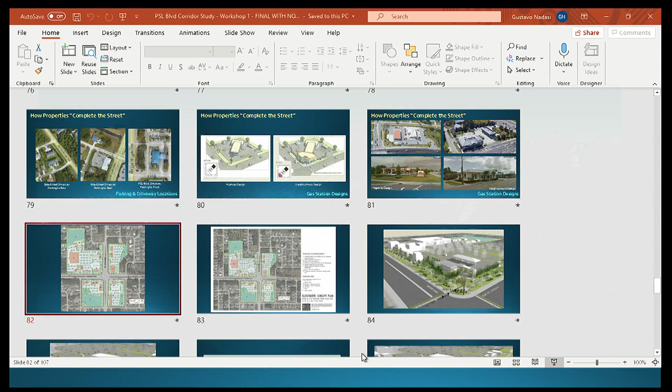Actually, I have a slide that shows that ratio. So, for example, again, we talked about the height to width ratios and the location of driveways and parking areas. So for example, the front to front and back to back relationships we discussed also exist for commercial properties as well.

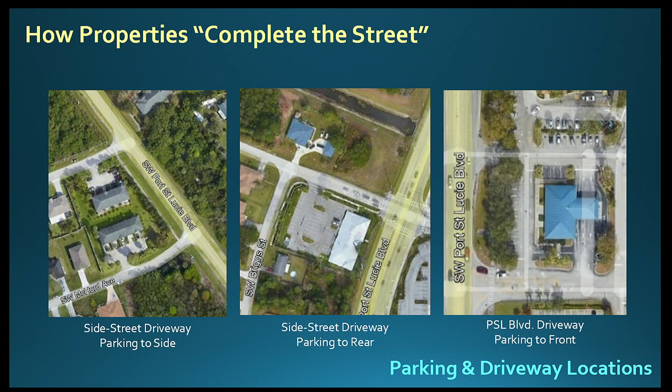Gas stations play a role in that, right? So kind of a highway oriented design, which could be built theoretically if the council wanted to allow it, could put the building at the back of the site and the gas pumps in front. So the front door of the site could be gas pumps, and the back of the site, the building. The alternative design is what we would suggest, perhaps a more neighborhood-focused design, where the building is the first thing you meet on that site, and the canopy is at the back of house, at the back of that lot.

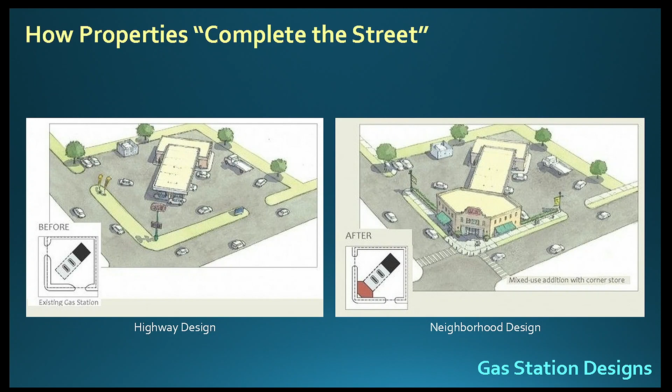The alternative, this happens to be over in Palm City, on a road that was recently improved. This is an alternative design where the first thing you see on this site, at least from this roadway edge and the internal edge, is a building that's occupied, right? It has a roof and more formality to it, helping hold the edge of the street, with the canopy at what's considered the rear of the site.

Okay? So again, I didn't mean to distract the discussion, but since you guys asked that question, I didn't want to not have a chance to bring you up to speed on those discussions that have taken place.

Okay? So, Avi, could you switch back over to tonight's presentation, please? Oh, can I do it? Ah, I love being in control. Fantastic. Is it this guy? Look at that, work in progress presentation. Okay, fast forward to the end of the presentation. There we go. Are there other questions in the Zoom room, Lauren?

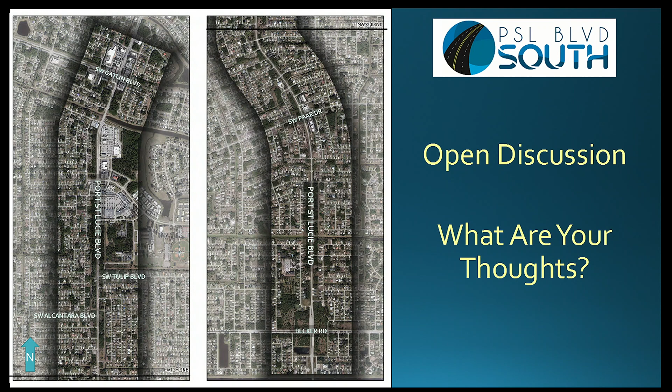So, okay, thank you for your input tonight. This is a long process for the city, right? Building a city takes a long time. It takes a generation to build a city. And so in the corridor study process, we're towards the end of our findings and recommendations, but it's really the beginning of the city's implementation. So there's a long way to go yet.

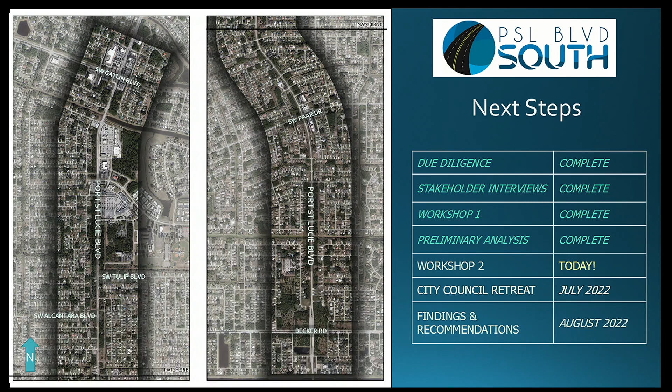The council has its retreat in a couple of weeks in July. We'll be presenting a summary of tonight's presentation along with the feedback that we heard from you and the folks in Zoom, so the council is up to speed on the findings and recommendations and what the public input has been along the way. And then with that, we'll develop a final report for the city that the city will be receiving later this summer. You'll see that advertised as it goes through its process and have a chance to continue to participate, either in those hearings as they take place over time or directly with the city staff.